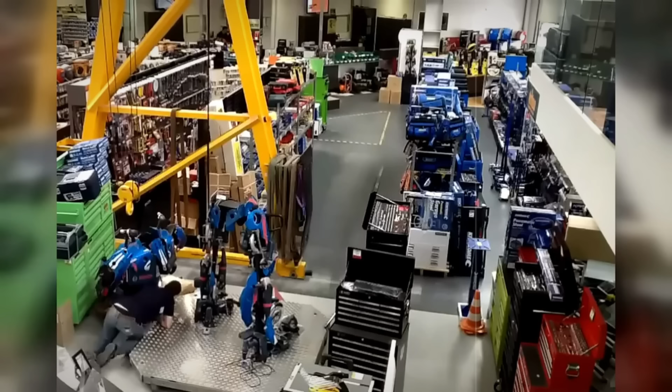Malaga, Western Australia, 2026. The showroom floor at Beyond Tools. Two Woodfast M910 wood lathes sit side by side, same badge, same model number, same word in horizontal font. One weighs 500 pounds, cast iron, made at 912 Port Road, Woodville, South Australia, in 1978. The serial number was stamped by a fitter named Graham Dowling.

The other is a lathe cast in Laoshan District, Qingdao, Shandong Province, China, priced at approximately 3,995 Australian dollars, made by Qingdao Jinling Electric Company in 2024. Both machines carry the Woodfast trademark. Both are called M910. Only one was made by Australians.

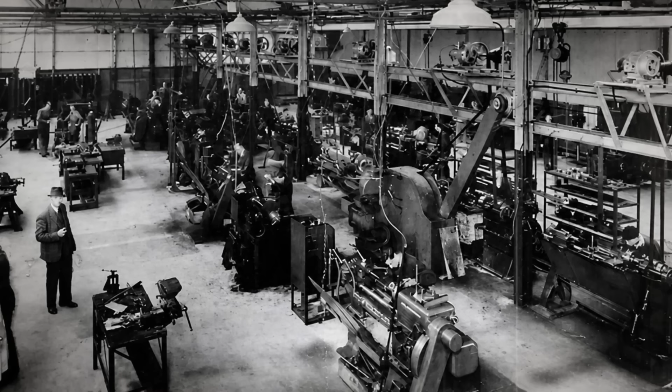85 years after Bonar Powell and John Hagan opened a workshop in Woodville on the 11th of June, 1941 — exactly 1 year to the day after Robert Menzies signed the Department of Munitions into being — the Woodfast that made the first machine no longer exists. The one that made the second is Chinese.

Chapter 1. Two M910s. Beyond Tools opened in 1986 as a wood tools and machinery sales business. Its warehouse and showroom sit in Malaga, a light industrial suburb 12 kilometres northeast of the Perth GPO. Tony Mirabile, the founder, has been in the woodworking machinery trade for 4 decades.

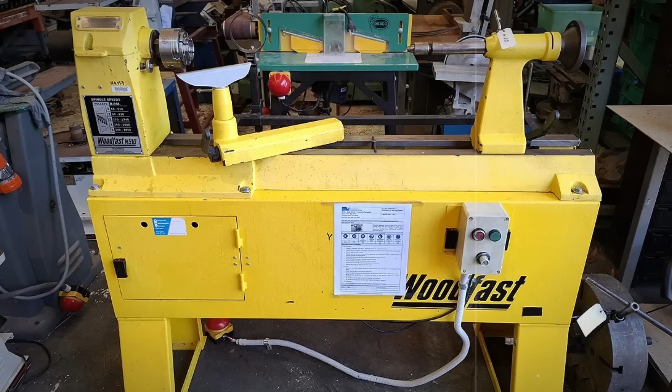On the floor today, a Woodfast WL5220A 20-inch heavy-duty lathe, approximately 3,995 Australian dollars. Beside it, a Woodfast M910. The M910 designation dates to the 1970s. The badge on the front dates to the 1940s. Both are unchanged.

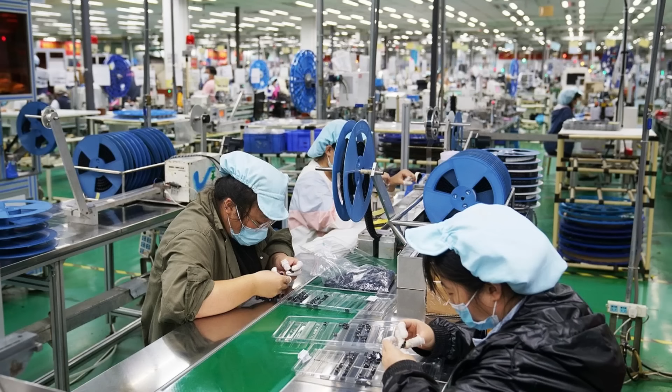6,000 kilometres northeast of Malaga, in a factory Beyond Tools has never visited, both machines were cast, machined, assembled, tested, boxed and shipped. That factory is Qingdao Jinling Electric Company in the Laoshan district of Qingdao, founded 1991. Between 300 and 450 employees, 24,000 square metres, 13 production lines, up to 500,000 woodworking machines a year, exported to Germany, Italy, Austria, the Czech Republic, the United States and Australia.

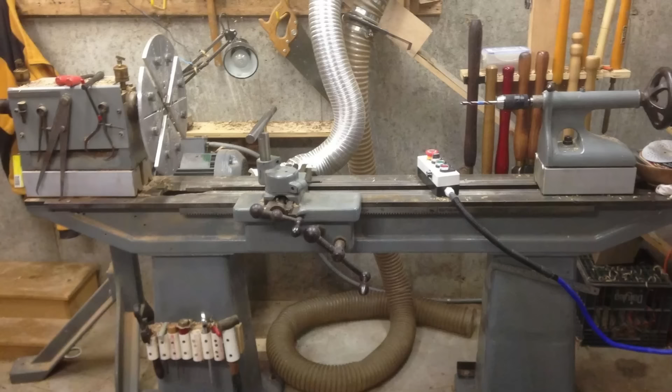The Woodfast M910 is one of those machines. The M910 that came off a South Australian shop floor in 1978, that a Western Australian wood turner bought second-hand in the 1990s and has used every Saturday morning since, is not on the Beyond Tools showroom floor. That machine has never been for sale in a showroom.

It came out of Port Road, Woodville. It ended up in a shed in the Perth suburbs. The Woodfast that made that machine, Woodfast Machinery Co, Adelaide, no longer manufactures anything. The Woodfast that made the machine on the Beyond Tools showroom floor is Qingdao Jinling Electric Company, a wholly Chinese firm operating an Australian brand name under a licence granted in 2004.

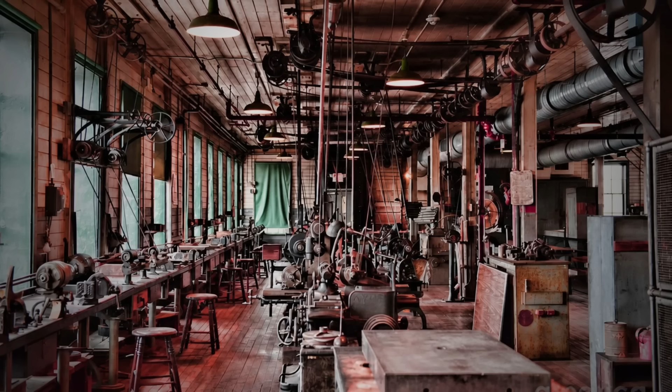Both machines are called Woodfast M910. Only one was made in Woodville. The other is a Chinese lathe with an Australian badge. But this story does not begin in a Beyond Tools showroom in Malaga in 2026. It begins in a workshop in Woodville, South Australia on the 11th of June 1941, exactly 1 year to the day after Robert Menzies signed into law the Department of Munitions that would arm the Pacific War.

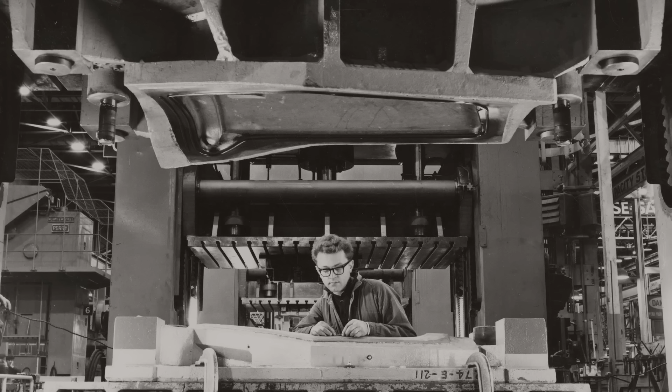Chapter 2. The Toolmakers of Woodville. The 11th of June, 1941, Woodville, South Australia. Two young toolmakers, Bonar Powell and John Hagan, register a partnership, trading name P&H Tools, S.A., Powell first, Hagan second. Their workshop stands in Woodville, an industrial suburb 8 kilometres northwest of the Adelaide GPO.

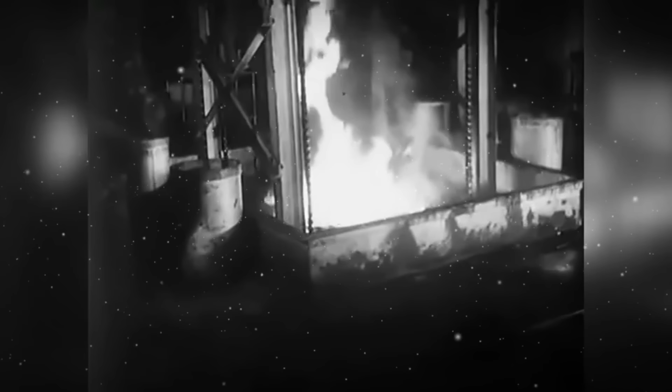Woodville has been transformed over the preceding 12 months by the wartime munitions surge. Premier Thomas Playford has drawn to South Australia the General Motors Holden Woodville plant, a short distance east, retooling for military production. 3 kilometres northwest lies the Hendon Small Arms Ammunition Factory. 2 kilometres due north sits the Finsbury Munitions Factory, opened February 1941. 10 kilometres further northeast, on the plains outside Salisbury, 3,000 men are pouring concrete for the largest explosives factory in Australian history. Powell and Hagan open their doors into this.

They do not make munitions. They make precision engineers' hand tools: squares, micrometers, machinists' rules, precision instruments for a country arming itself.

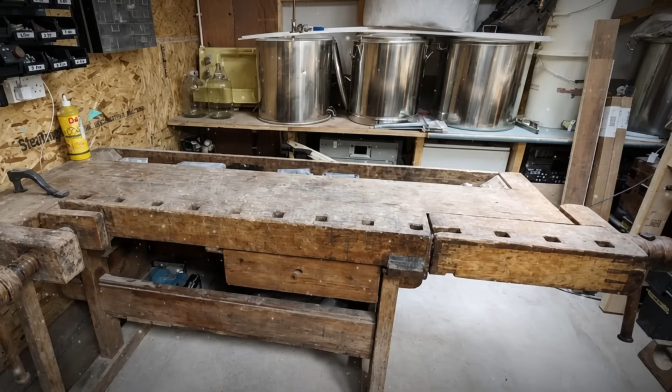The biographical record of Bonar Powell and John Hagan before that day in June 1941 is thin. No birth registration for either has been located in publicly accessible South Australian records. No prior employer is named. No trade paper obituary has been found for Powell. Hagan's later career is traceable through the company's own historical page, but of the men themselves, before Woodville, the record is silent. What is documented is what they built.

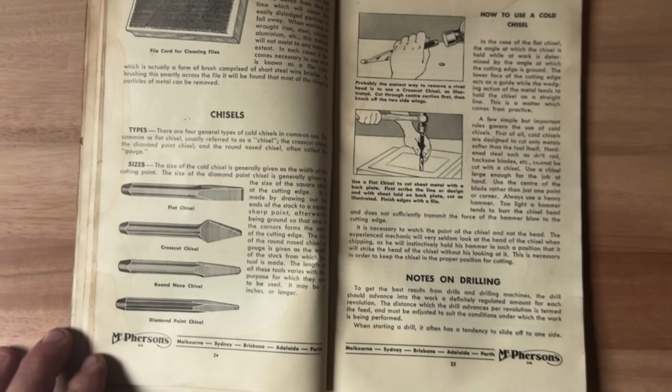1944. Powell and Hagen produced their first woodworking machine, a small belt and disc sander marketed under the trade name Woodfast. The origin of the name is undocumented, but what it evokes is exactly what it says: wood worked fast. A 4-inch buzzer and jointer follows, then a 14-inch cast-iron bandsaw that begins a 30-year supply relationship with McPherson's Hardware, which ships Woodfast bandsaws into every Australian hardware showroom from Perth to Cairns.

1946. The partnership discontinues engineers' hand tools. John Hagen becomes sole proprietor. Whether Bonar Powell exited voluntarily, was bought out, or died is not recorded in any accessible source. What is recorded: the Hagen family will own Woodfast for the next 58 years.

1950. The company renames Woodfast Machinery Company, October 1950. Hagen buys the Port Road, Woodville site, corner of Findon Road, 2 acres — the address that will become synonymous with the Woodfast brand for the next 59 years.

But before the Woodville workshop could arm a nation of woodworkers, before McPherson's could sell Woodfast bandsaws in every Australian hardware store, before Graham Dowling could walk through the Port Road gate as a 16-year-old apprentice, a different Melbourne, one year to the day earlier, had already begun to arm the country against a very different threat.

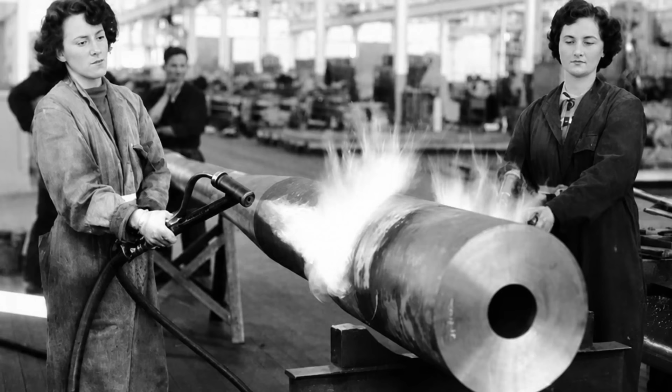Chapter 3. One year to the day, the 11th of June, 1940, Melbourne. Prime Minister Robert Menzies signs into law the national security regulations that formally establish the Department of Munitions. It is one week after the last British soldier is evacuated from Dunkirk. It is the day Australia accepts that Britain cannot arm the Empire alone. The man Menzies appoints as Director General is Essington Lewis, Managing Director of the Broken Hill Proprietary Company.

59 years old, born in Burra, South Australia, 13th of January, 1881. On the wall of his office at Munitions headquarters in Melbourne, framed in block capitals: 'I am work.' Lewis's charter, later described by cabinet colleagues, was as wide as the seas and as high as the sky — ultimate control over all ordnance, all explosives, all ammunition, all small arms, all aircraft, all vehicles, and critically for this story, all the machine tools used to make them.

Premier Thomas Playford of South Australia secures a disproportionate share of the wartime industrial windfall for his state. He argues Adelaide's central location and distance from the northern approaches make it defensible. Cabinet agrees.

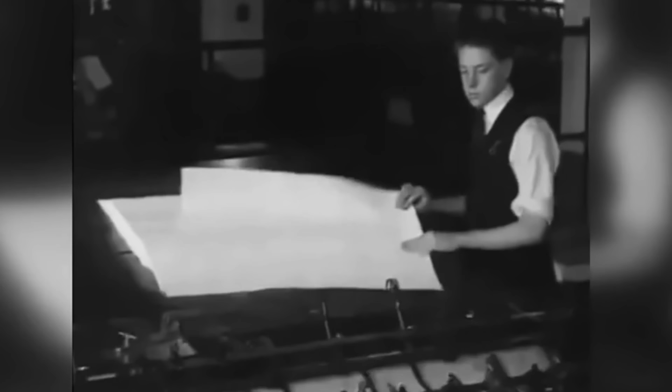The Adelaide toolmaking milieu explodes across the following 12 months. F.W. Hercus at the Barton expands. Perry Engineering at Mile End expands. Richards Industries at Keswick expands. Islington Railway Workshops takes on Beaufort sub-assemblies. Hendon Small Arms Ammunition Factory ramps to 100 million rounds a year. Finsbury Munitions Factory opens in February 1941. Salisbury Explosives Factory rises from bare paddock across late 1940 and 1941.

By June 1941, Woodville is not a suburb of Adelaide anymore — it is an industrial ring around a wartime capital. Read that again: exactly one year to the day after Menzies signs the Department of Munitions into being, on the 11th of June 1941, two young toolmakers named Bonar Powell and John Hagan open a workshop in Woodville, 10 kilometres from Salisbury, 5 from Hendon, 2 from Finsbury, 4 from GMH Woodville.

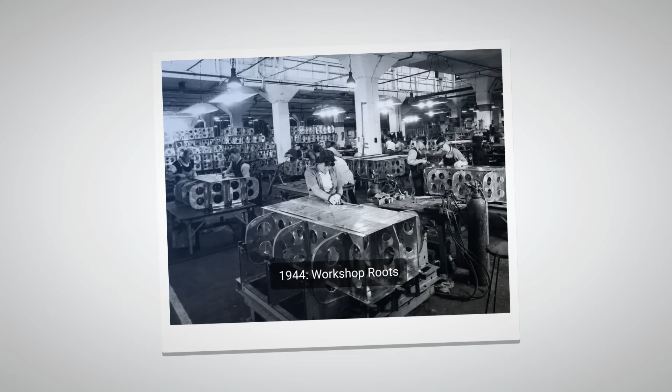They do not make munitions. They make precision engineers' hand tools. But they open their doors into a Woodville transformed by the war economy Essington Lewis has built. The company Powell and Hagan built at Woodville would not, in any documented sense, arm the war. But it would inherit the industrial ecosystem that did, and that inheritance would carry Woodfast for the next 63 years.

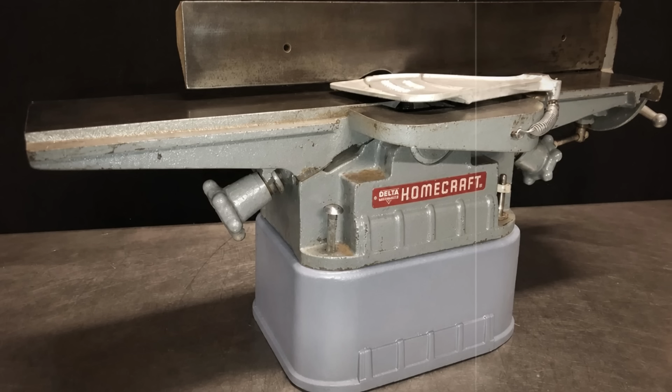Chapter 4: The Sander and the Bandsaw, 1944. Woodville. Powell and Hagan produced their first woodworking machine, a small belt and disc sander, cast iron body, marketed under the trade name Woodfast. It sells. A 4-inch buzzer jointer follows. Then the machine that will define Woodfast for the next four decades: a 14-inch cast iron bandsaw.

McPherson's Limited, the Sydney-Melbourne hardware distributor, established 1860 in Melbourne. By 1944, the largest hardware and machinery retailer in Australia, signs a supply agreement with Powell and Hagan. The relationship will last 30 years. Woodfast bandsaws ship into every McPherson's showroom from Perth to Cairns.

Farmers buy them. Cabinet makers buy them. Boat builders buy them. A country that has just finished making bomber wings on rail shed lathes has, in the post-war years, hobbies again.

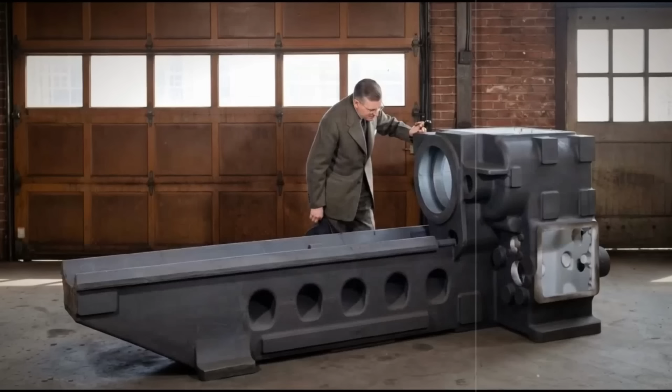1946. Engineers' hand tools are discontinued. John Hagan becomes sole proprietor. Whether Bonar Powell was bought out, retired voluntarily, or died is not recorded in any accessible public source.

What is recorded: the Hagan family will own Woodfast for the next 58 years. 1950, the company renames Woodfast Machinery Co, October 1950. Hagan buys the Port Road, Woodville site, two acres, corner of Findon Road, the address that will become synonymous with Woodfast for the next 59 years, until the 1st of December 2009, when the last Woodfast truck leaves Port Road for the last time.

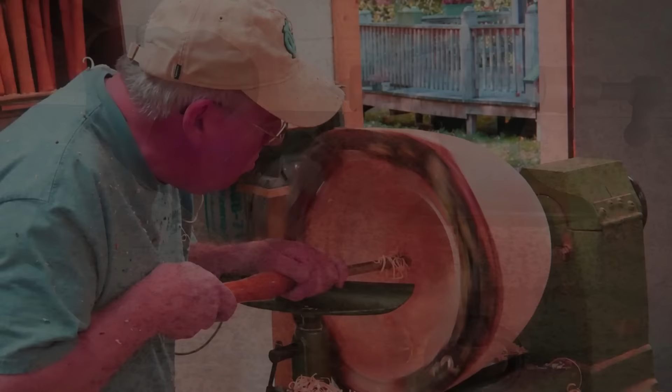Through the 1950s and 1960s, the product line expands. Wood lathes enter the range. The M910 lathe, the model number that will define Woodfast to a generation of Australian apprentices, enters production. 500 pounds of cast iron, heavy-duty class, cast headstock, solid tailstock, made to be used every day for 50 years. The M910 ships into TAFE workshops across South Australia, Victoria, New South Wales and Western Australia. It becomes the machine every Australian apprentice woodworker learns on.

A boy in Elizabeth turning his first bowl learns on a Woodfast M910. A boy in Broken Hill learning to shape a chair leg learns on a Woodfast M910. A boy in Rockhampton learning to spindle turn a stair baluster learns on a Woodfast M910.

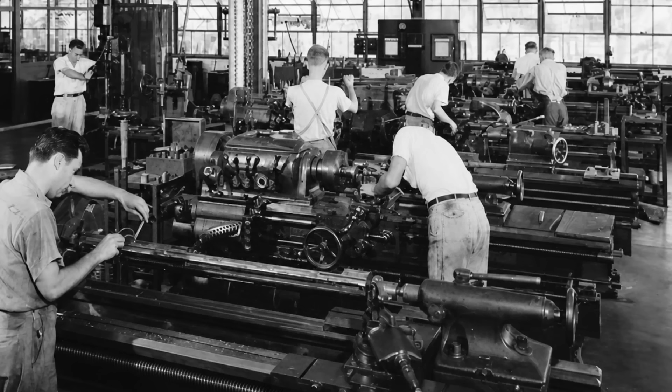Approximately 1967, a 16-year-old boy named Graham Dowling walks through the Port Road gate for the first time. He signs an apprenticeship indenture. Bonar Powell has been gone from the company for more than two decades. John Hagan is in his 50s. Woodfast has been trading under that name for 23 years. Graham will still be walking through Woodfast gates 56 years later.

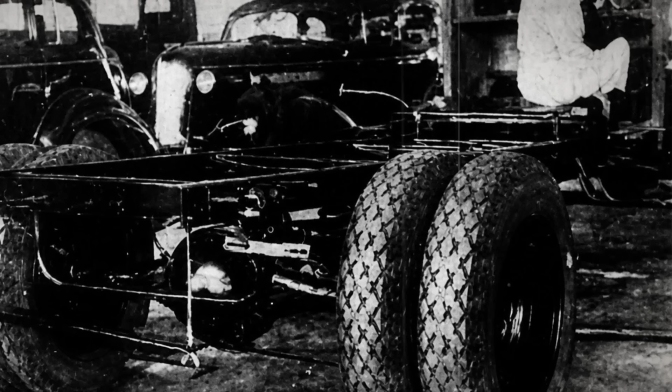But Woodfast did not grow in a vacuum. The Woodville that Powell and Hagan had opened their workshop into in 1941 was by 1945 the industrial heart of the Adelaide cluster that had armed the Pacific. The men who ran those cluster factories were Woodfast's neighbours, Woodfast's customers and Woodfast's suppliers.

Chapter 5. I Am Work.

May 1940, Melbourne. Prime Minister Robert Menzies appoints Essington Lewis, Managing Director of the Broken Hill Proprietary Company, as Director General of Munitions. Lewis is 59 years old, born the 13th of January 1881 in Burra, South Australia. He has led BHP since 1926. He is the most powerful industrialist in the country. On the wall of his office at Munitions headquarters in Melbourne, framed in block capitals: I Am Work.

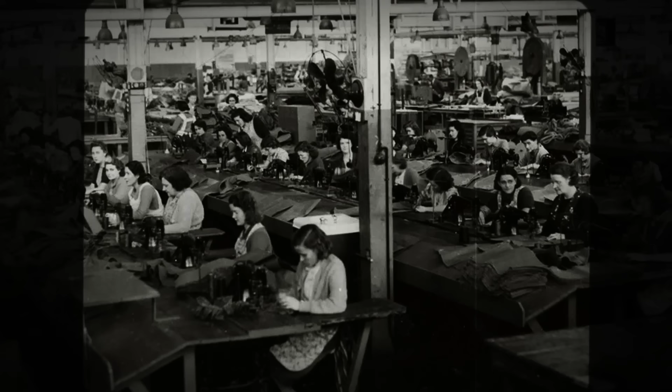The 11th of June, 1940, the Department of Munitions is formally established. Lewis places every South Australian machine shop, every engineering firm, every foundry, every railway workshop on a war footing. Contracts at actual cost plus a margin, usually 10%. No competitive tender, no negotiation.

January 1942, Lewis's powers are extended. He becomes Director General of Aircraft Production as well. He now controls both munitions and airframes. The Adelaide plants convert.

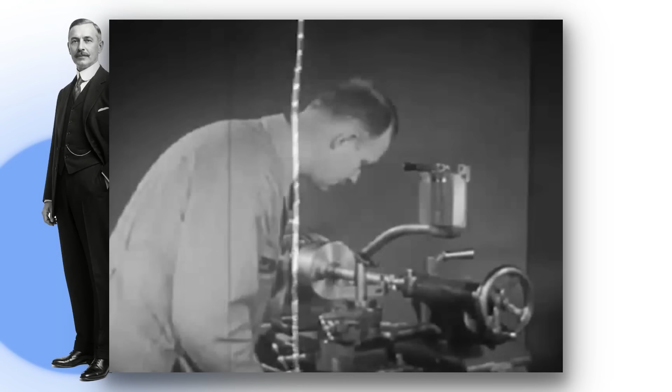F.W. Hercus of Thebarton, founded by Frederick William Hercus in May 1920, becomes the largest machine tool producer in the Southern Hemisphere. Under the Directorate of Machine Tools and Gauges, Hercus produces in excess of 2,300 machines during the war. The Hercus 9-inch swing lathe, a South Bend clone built at the War Department's request for the small arms factories, becomes the workhorse of Australian industry. 15,000 9-inch and 8,000 later Model 260 lathes will be built over the company's life.

23,000 lathes, Adelaide made. Perry Engineering at Mile End, founded by Samuel Perry, 1865 to 1930, the largest engineering company in South Australia by 1916. In the Second World War, major munitions component maker plus 75-foot steel tugs across 1944 and 1945.

T.J. Richards and Sons, renamed Richards Industries Limited in September 1941. The Keswick and Mile End South plants. From mid-1942, producing wing panels, centre sections and fuselages for the Bristol Beaufort bomber. Also Lancasters. Also the CAC Wirraway.

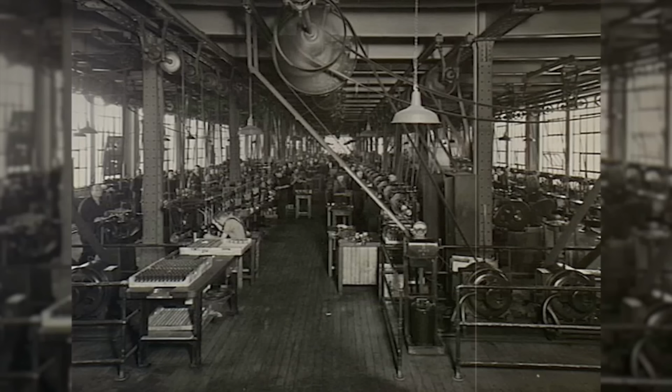Islington Railway Workshops, Beaufort mainplane and central component production, feeding the 700 aircraft Beaufort program. Hendon Small Arms Ammunition Factory, one of the largest small arms plants in the Southern Hemisphere at wartime peak, produced .303 rifle rounds by the 100 million.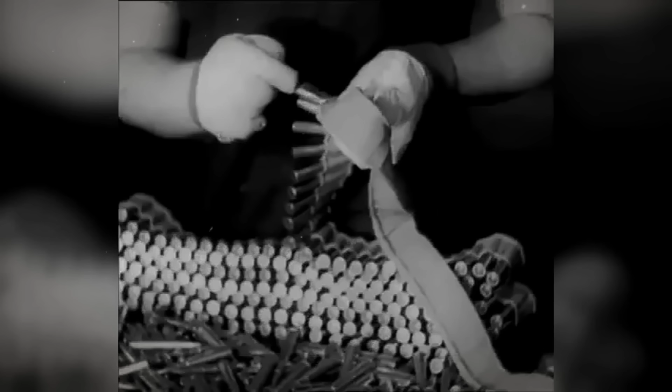Finsbury Munitions Factory opened in February 1941 on a 50-hectare site with approximately 4,000 workers, many of them women, and produced cartridge cases and fuses. Designed by engineer John Adrian Fargher, served by a rail spur running from Woodville Station. Salisbury Explosives Factory, the largest in Australia, built November 1940 to November 1941.

Approximately 3,000 workers. GMH Woodville, the General Motors Holden plant 4 kilometres from Powell and Hagan's workshop, was retooled for Beaufort airframe components, armoured car bodies, anti-tank guns, and Bofors gun tractors.

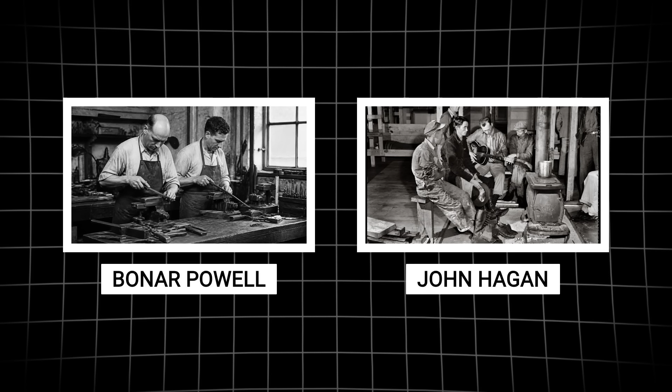And this is where it gets genuinely insane. The rail spur that carried cartridge cases from the Finsbury Munitions Factory to Woodville Station in 1942 ran within 600 metres of the Woodville workshop, where Bonar Powell and John Hagan were, at that exact moment, making precision engineers' hand tools for civilian sale. 600 metres. 2 minutes walk. Here's the thing.

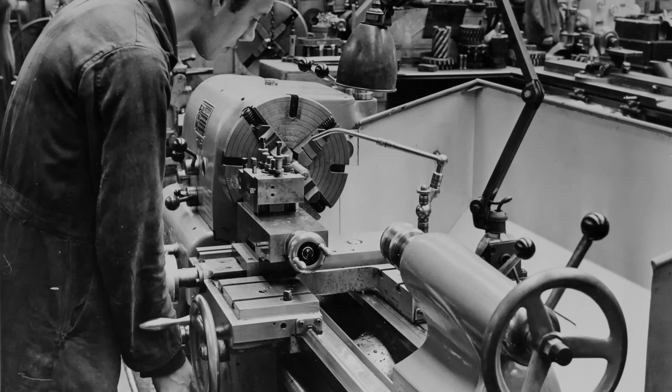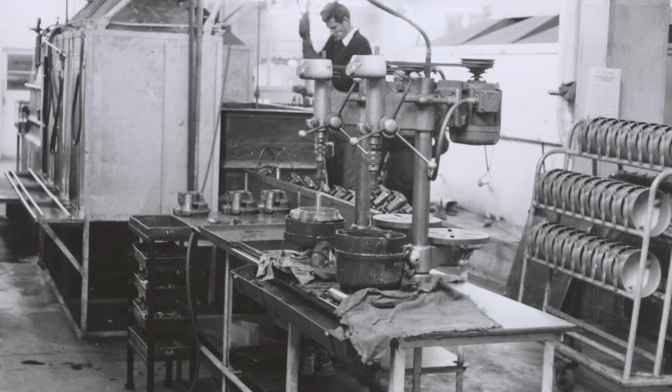Powell and Hagan did not make war material. No National Archives contract lists Woodfast. No Directorate of Machine Tools and Gauges roster names it. Woodfast's first product, the belt and disc sander, would not appear until 1944. Its bandsaw contract with McPherson's was post-war. Its lathes were post-war. But Woodfast grew up in the shadow of the plants Lewis armed. It inherited the workforce those plants trained. Every fitter and turner Woodfast hired in the 1950s had trained on a Hercus lathe under a Directorate of Machine Tools and Gauges apprenticeship. Every foundry in South Australia that supplied Woodfast castings had, in 1942, cast bodies for 25-pounder shells. Every draftsman who ever drew a Woodfast bandsaw schematic had learned his trade under wartime apprenticeship contracts administered by the Directorate of Machine Tools and Gauges. The Adelaide toolmaking milieu was not something Woodfast joined. It was something Woodfast was made from.

The Woodville that Powell and Hagan opened their workshop into on the 11th of June, 1941, 1 year to the day after the Department of Munitions was established, was the wartime industrial heart of South Australia. And when that industrial heart began to fail, 60 years later, Woodfast would fail with it.

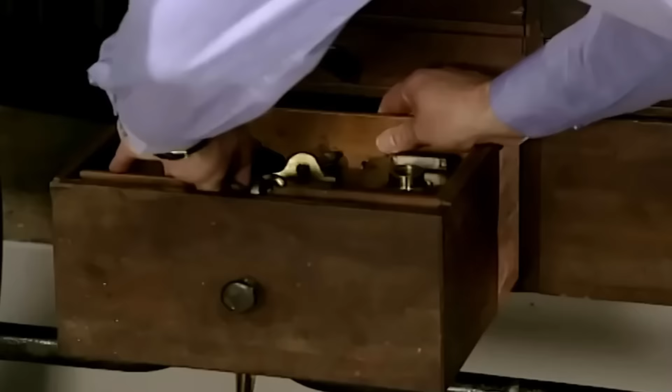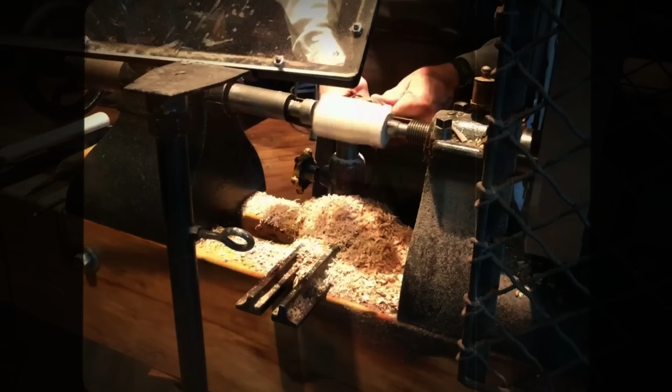Chapter 6. Port Road, October 1950. John Hagan buys the 2-acre site on the corner of Port Road and Findon Road, Woodville. Purchase price is not disclosed in any accessible record. Through the 1950s and 1960s, the factory expands. Woodworking machinery becomes the sole business. Bandsaws, buzzers, jointers, thicknessers, sanders, and increasingly, wood lathes. June 1965. Documented figure, the only headcount figure ever verified in the accessible archive, 61 employees at the Port Road plant.

21 distinct machine types in production. 12% of Woodfast's output goes overseas. The company ships into TAFE workshops from Perth to Cairns, into apprenticeship schools from Broken Hill to Wollongong, into every Australian shed that ever housed a serious hobbyist. The Woodfast M910 becomes the machine every South Australian apprentice trains on.

Approximately 1967. Graham Dowling walks through the Port Road gate at 16. He signs the papers. He will still be walking through those gates 37 years later, when the papers of a very different kind will be signed.

1980. The Port Road factory expands to 360,000 square feet. Woodfast is by now the dominant Australian woodworking machinery manufacturer. 1984. John Hagan retires. He has led the company for more than 40 years. His replacement as Managing Director, Bronte Edwards. 1984, the same year, a new showroom and administration complex is completed on the Port Road frontage. Cost, approximately 300,000 Australian dollars. It is the physical announcement that Woodfast has arrived.

1984, the same year. On the 30th of May, in Canberra, Senator John Button announces the Motor Industry Development Plan. Vehicle tariffs will fall from 57.5% to 15% by 2000. The Woodfast showroom rises on Port Road at the exact historical moment John Button begins dismantling the tariff structure that has made Adelaide machine tool manufacturing viable.

Neither Bronte Edwards, nor Graham Dowling, nor any of the 61 Port Road employees fully understand what has just happened. The tariff cut that had begun on the 18th of July 1973 would not close Woodfast in that year or the next or the one after. But every year after 1973, the machine tool industry that Woodfast belonged to shrank.

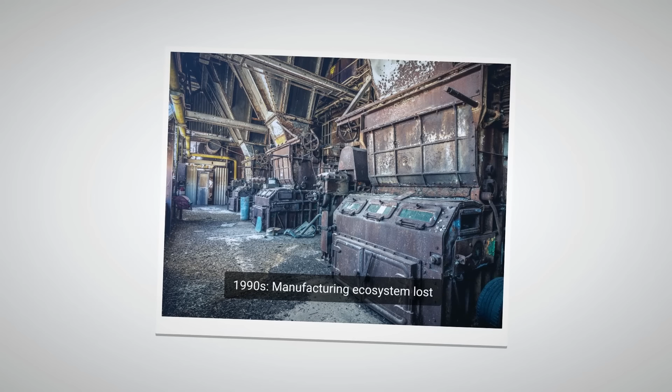Chapter 7. The Cascade, 18th of July, 1973, 7 p.m, Canberra. Prime Minister Gough Whitlam and Trade Minister Jim Cairns announce a 25% across-the-board cut to all Australian import tariffs. Effective midnight, Australian machine tool manufacturing faces imported competition for the first time since the wartime protection wall went up. Between 1973 and 1980, Australian manufacturing employment falls by approximately 80,000 jobs. The Adelaide cluster begins to contract.

30th of May 1984. Senator John Button announces the Motor Industry Development Plan. Vehicle tariffs to fall from 57.5% to 15% by 1992. May 1988. Prime Minister Bob Hawke's economic statement, the largest general tariff cut since Whitlam's 25% quarter. The general manufacturing rate is placed on a downward glide path. 12th of March, 1991. Treasurer Paul Keating's One Nation statement extends the tariff cuts to the year 2000.

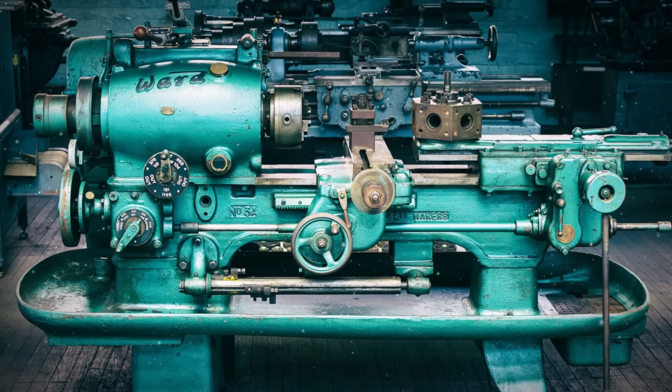1997. Prime Minister John Howard freezes the passenger vehicle tariff at 15%, but the machine tool tariff has already gone. The manufacturing environment Woodfast grew up in has ended. 2000, manufacturing tariff at 15%. 2005, 10%. 2010, 5%. Here's the thing.

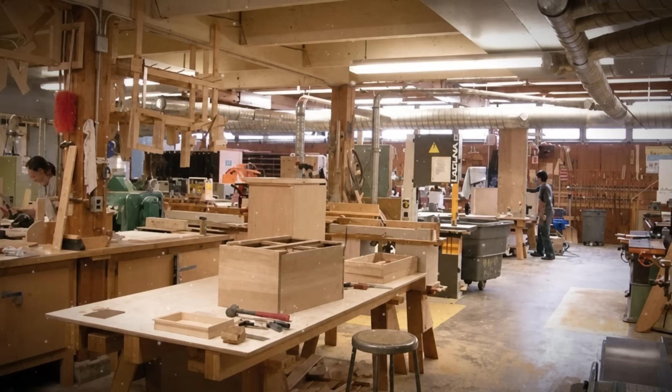Woodfast did not shut down in any of these years. It kept trading, it kept selling M910 lathes. Bronte Edwards ran the shop, Graham Dowling was on the floor. But every year, more of the components Woodfast sourced came from overseas. Every year, fewer apprentices came through the door, because the TAFE workshops that bought Woodfast lathes were themselves shrinking.

Australian apprenticeships had peaked at 161,000 in 1990. By 1994, they had fallen to 131,000. The training pipeline that had fed Woodfast's customer base for 40 years was closing. And Woodfast's Adelaide same-lane peer, F.W. Hercus of Thebarton, the company that had built 23,000 lathes across 85 years, showed Woodfast what the ending looked like.

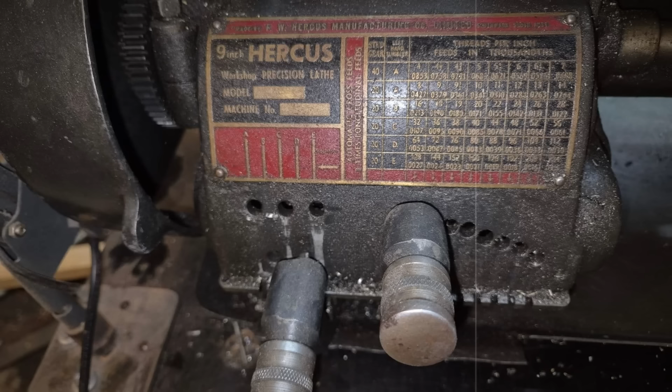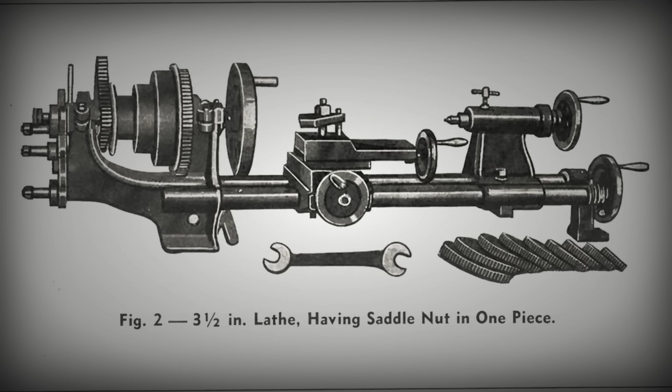Chapter 8: What Hercus Did. F.W. Hercus, founded May 1920 by Frederick William Hercus, Payneham Road, then Anderson Street, Southwark from 1939, then Regency Park, 23,000 lathes across the company's life. The Hercus 9-inch swing became the standard Australian workshop lathe, the machine every Australian tradesman under 60 learned on. The Hercus name was to Australian machine tools what the Hoover name was to American vacuum cleaners.

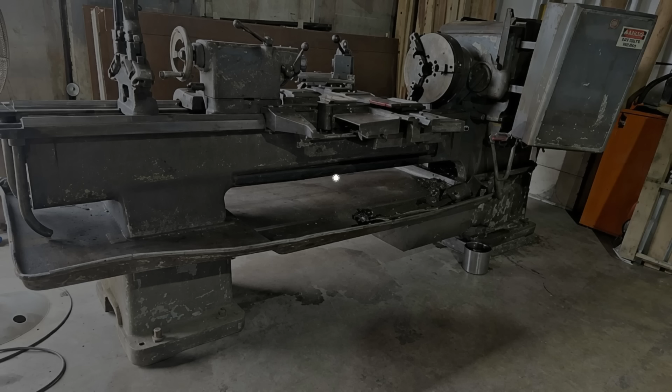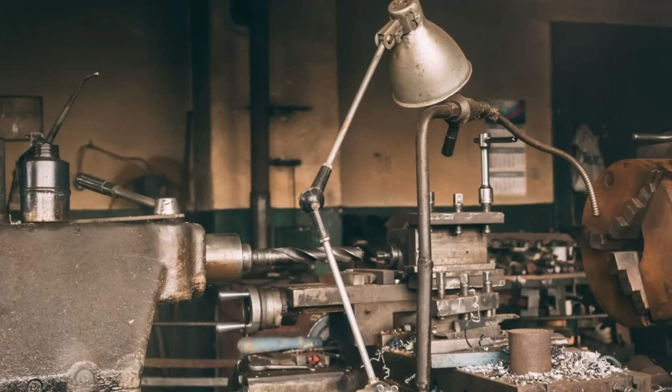The Regency Park site continues as a general engineering business under Durden ownership. The lathe business dies. 23,000 Adelaide-made lathes, 85 years, gone. Let that number sit for a moment. 23,000 lathes, 85 years. Every Australian technical college and trade school workshop in the 1950s, 60s and early 70s, and

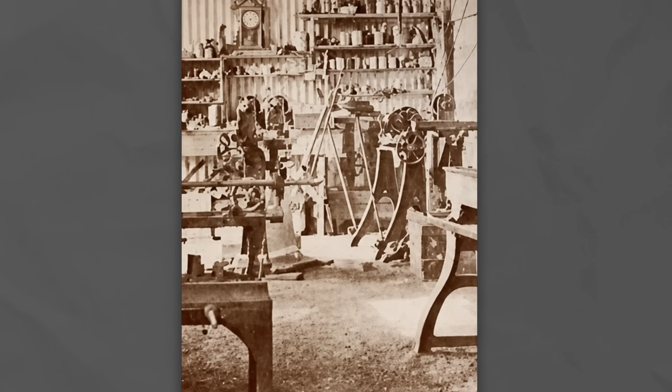every TAFE workshop from 1974 onwards had a Hercus in it. Every South Australian tradesman under the age of 70 today learned to turn on a Hercus. And by 2005, that company, the largest machine tool maker in the Southern Hemisphere at its peak, no longer existed as a manufacturer.

If you were Bronte Edwards, sitting in the Port Road office in 2003, watching Hercus die 4 kilometres away across Woodville, you were watching your own industry die in real time. If you were Graham Dowling on the Woodfast shop floor, watching the trucks unload imported components from Taiwan and China because the local castings foundry no longer took orders for cast iron lathe beds, you were watching the ecosystem that had made you a tradesman disappear.

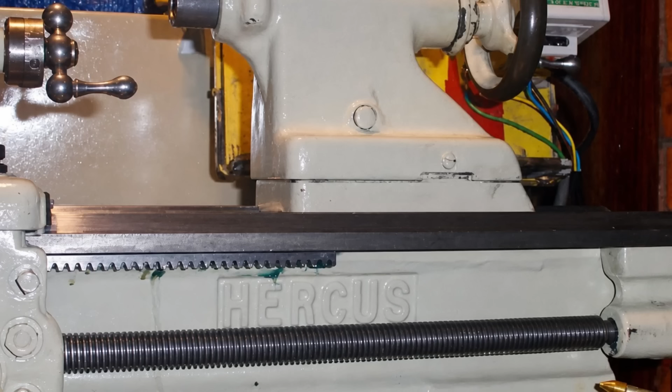The question at Port Road by the early 2000s was not whether, it was how. And on a day in 2004, the exact date not recorded in any accessible public source, Woodfast Machinery Co chose how. Chapter 9.

2004, Port Road, Woodville, South Australia. Woodfast Machinery Co signs papers with Qingdao Jinling Electric Company of Laoshan District, Qingdao, Shandong Province, China. The transfer is not what most Australian brand offshorings look like. It is not a full corporate acquisition. It is not a receivership fire sale.

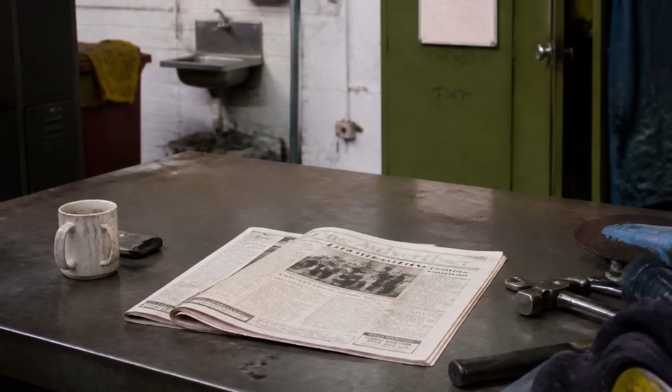It is not, as far as any public record shows, driven by insolvency. There is no ASIC Administrator's Notice for 2004. There is no Advertiser front page. There is no AMWU press release. What Woodfast transfers is specifically the following: the design and manufacturing rights for 2 lathe models, the C1000 and the M910, and the single-word trademark Woodfast, in horizontal font. 2 blueprints, 1 word, 1 Chinese company. Read that again. 2 blueprints, 1 word, 1 Chinese company.

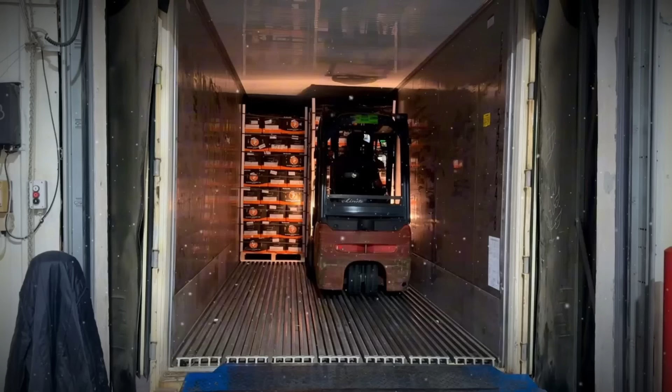Not the factory, not the workforce, not the tooling, not the company itself. Just the drawings and the name. The Adelaide Woodfast Machinery Co keeps trading. It continues at 912 Port Road. It continues to distribute machinery, increasingly imported.

Bronte Edwards continues as managing director. Graham Dowling continues on the floor. But the M910, the heavy-duty cast-iron lathe that had defined Woodfast for 4 decades, is now, in law, a Qingdao product. The individual who signed the papers on the Australian side is not named in any accessible public record. No press release, no Advertiser story, no Hansard reference, no AMWU response. No obituary or interview since.

The papers were signed quietly. The Qingdao executive who signed on the QCR side is not named either.

QCR would formally register the Woodfast trademark in 2014, 10 years after the transfer, when the machines it had been building under the licence had established a market presence significant enough to warrant formal trademark protection.

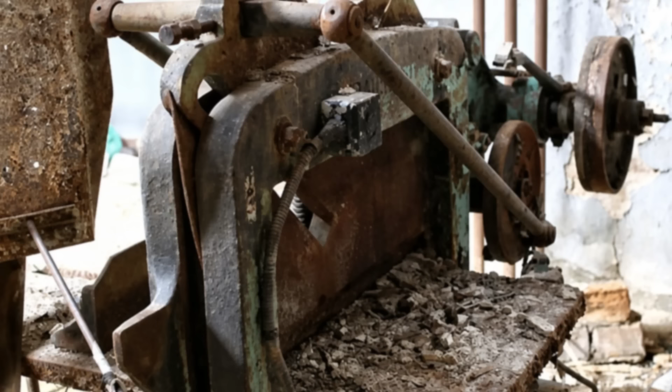Sale price, not disclosed. Not in ASIC records. Not in Chinese state disclosures. Not on the Woodfast historical page. Not in any accessible archive. Employment at the Adelaide plant immediately before the transfer, not documented. Employment lost after the transfer, not documented.

What is documented is what was sold: 2 blueprints, 1 word, 1 Chinese company. That is what Woodfast, the Australian company, sold on that day. The buyer's factory in Laoshan was 13 years old at the time of the transfer.

QCR had been founded in 1991. The 2 blueprints, one for the C1000, one for the M910, represented 40 years of Adelaide toolmaking iteration, of Powell and Hagen and their successors refining cast iron beds and headstock alignment across 4 decades. That accumulated knowledge transferred to QCR in the form of technical drawings. Blueprints can be copied. Institutional memory cannot.

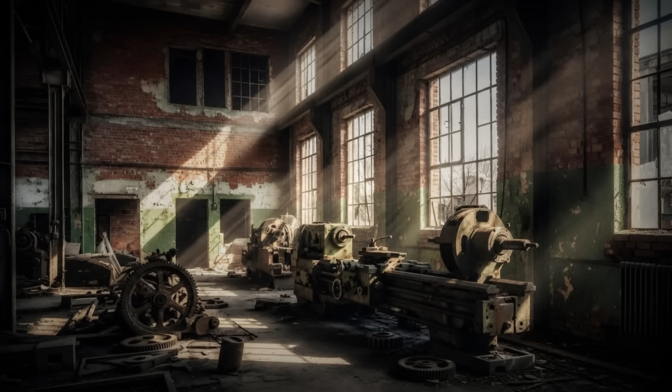And on the 1st of December 2009, 5 years, 5 months, and roughly 3 weeks after those papers were signed, Woodfast Machinery Co left Port Road for the last time.

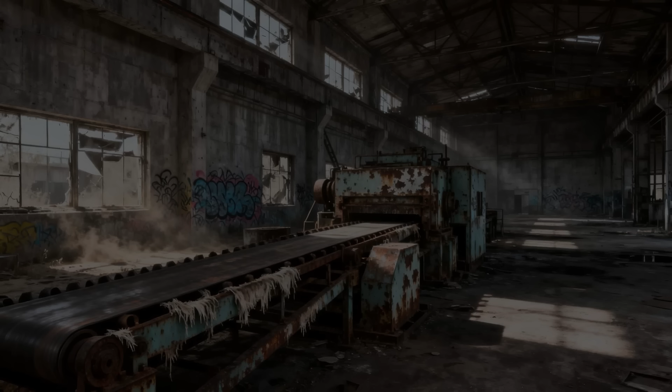Chapter 10. Royal Park, 1st of December 2009. Woodfast Machinery Company, Australia Proprietary Limited relocates from 912 Port Road, Woodville to 1174 Old Port Road, Royal Park, 6 kilometres away. The move is not marketed as a closure, it is marketed as a modernisation. New premises, better logistics, consolidated operations. The reality: the Port Road factory that had made lathes for 59 years is no longer needed.

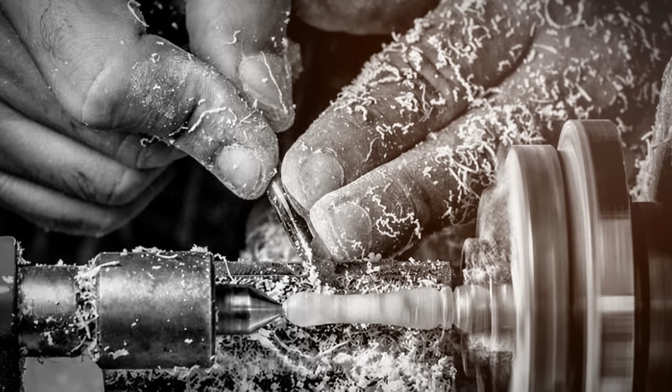Manufacturing is in Qingdao. The Royal Park address is a distribution and service operation. A new corporate entity, Woodworking Solutions Proprietary Limited, is formed at Royal Park. Its principals, Graham Dowling and a colleague known only as Steve, both are ex-Woodfast men. Both have decades on the Port Road floor.

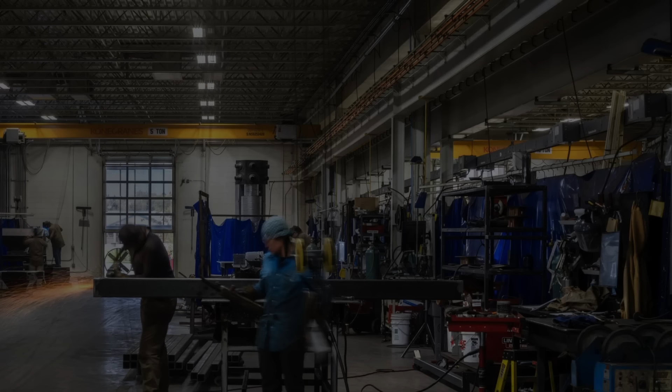Graham Dowling is now approximately 58 years old. He has been at Woodfast since he was 16. He does not fully retire. He runs Woodworking Solutions from Royal Park, selling and servicing the Chinese-made Woodfast lathes his company had, 5 years earlier, sent the blueprints for. Steve joins him. Steve's surname does not appear in any accessible record.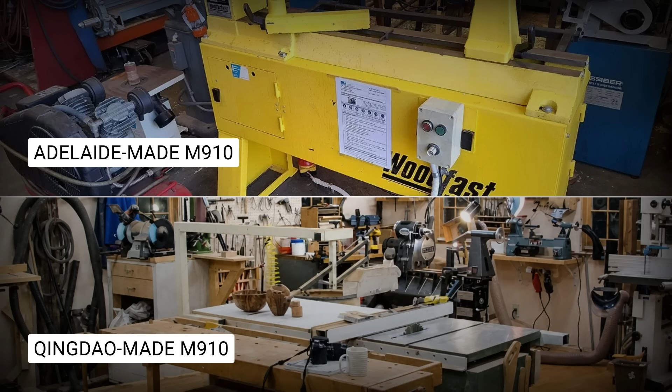Through the 2010s, Woodworking Solutions continues. Graham Dowling walks into Royal Park each morning. He services machines he built himself 30 years earlier. He services machines he sent the blueprints for 5 years earlier. Sometimes both machines are on the workshop floor on the same day. The Adelaide-made M910 and the Qingdao-made M910, side by side, waiting for parts. Same badge, different weight, different castings, same customer.

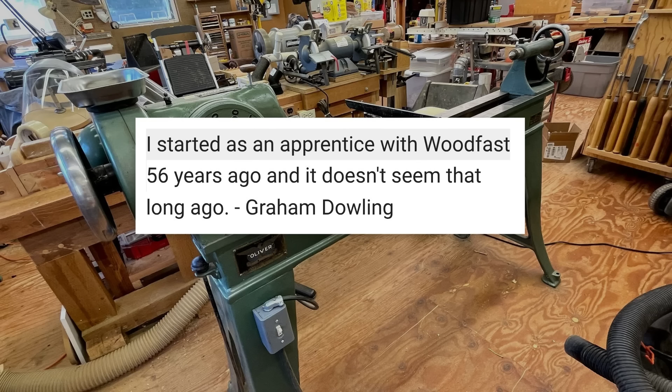Graham writes a Facebook post in 2023, a message on the Australian Woodworkers Facebook page that reads, in his own words: 'I, Graham, started as an apprentice with Woodfast 56 years ago, and it doesn't seem that long ago.' 56 years, 1967 to 2023. From the Port Road floor to the Royal Park distribution counter. From the machines Bonar Powell and John Hagan cast in Woodville to the machines Qingdao Jinling Electric Company cast in Laoshan.

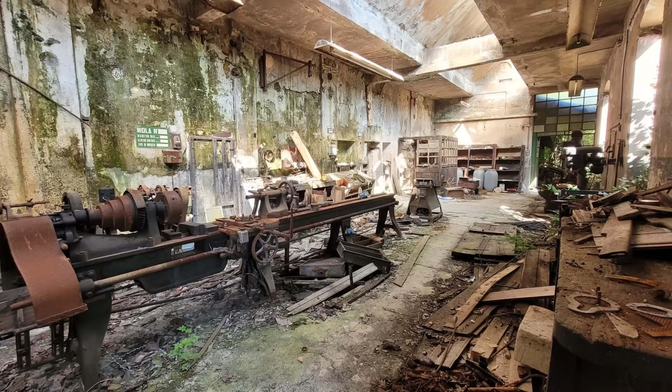Between approximately 2018 and 2022, the exact date not recorded, Woodworking Solutions ceases trading. Graham Dowling retires. Steve retires. The last Adelaide business carrying the Woodfast name in a working sense closes. The Woodfast brand does not die. It has, by 2021, a new Australian steward, Tony Mirabile, of Beyond Tools in Malaga, Western Australia.

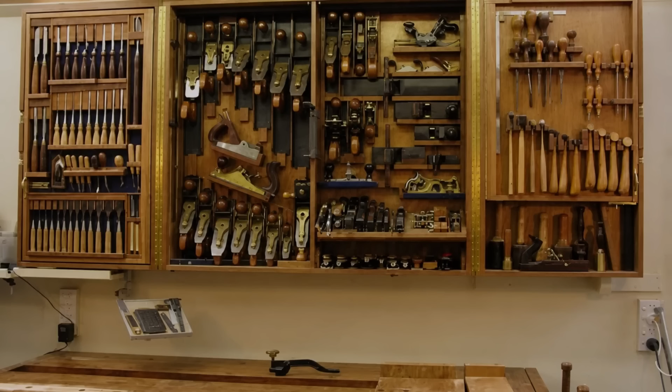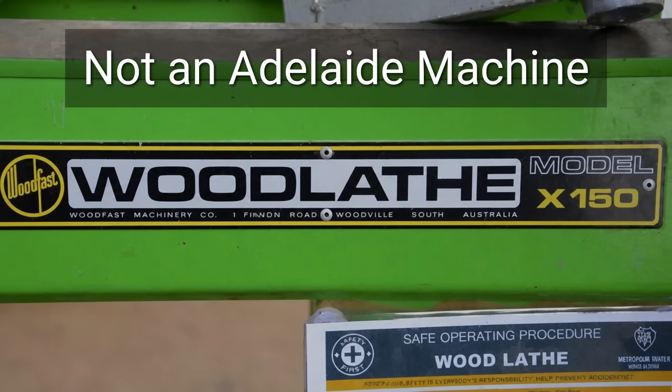The Woodfast M910 you can buy from Beyond Tools in Malaga today is not the M910 that Powell and Hagan designed. It carries the same model number. It carries the same word in horizontal font. It is made in Qingdao. It is distributed from Malaga. It is not, in any sense that would be recognised by the men who trained Graham Dowling, an Adelaide machine.

And if you walk into Beyond Tools in Malaga today, you can buy a Woodfast M910 wood lathe for approximately $3,995 Australian dollars.

It weighs less than the one Graham Dowling used to build. It comes from a factory Graham has never seen. Chapter 11: The same model number.

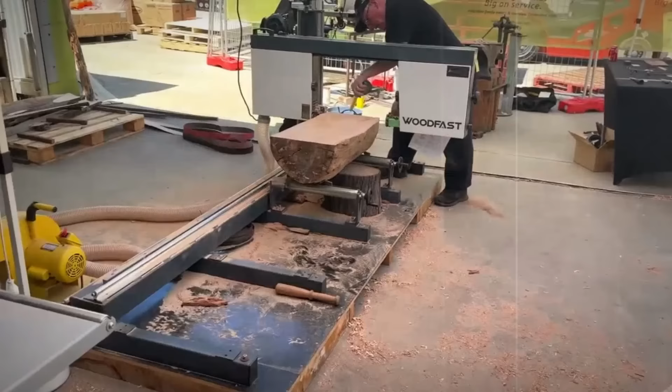Walk into the Beyond Tools showroom in Malaga, Western Australia today. Turn left past the entrance, into the Woodfast section. On the floor, a Woodfast WL520A 20-inch heavy-duty lathe, retail price approximately $3,995 Australian dollars.

Beside it, a Woodfast M910. The badge is the same badge that sat on the machines Bonar Powell and John Hagan shipped from Port Road, Woodville, in the 1970s. The model number is the same model number Graham Dowling stamped on machines in 1978. The company that made the machine on the showroom floor is Qingdao Jinling Electric Company of Laoshan District, Shandong Province, China. The company that made the machine Graham Dowling stamped in 1978 no longer exists as a manufacturer.

6,000 kilometres away, at 912 Port Road, Woodville, the corner of Findon Road, the 2-acre site Woodfast bought in October 1950 either still stands empty of purpose or has been demolished for something else. The public record does not confirm which. There is no heritage plaque, no marker to indicate that this was the address of the largest Australian-made woodworking machinery manufacturer of the 20th century.

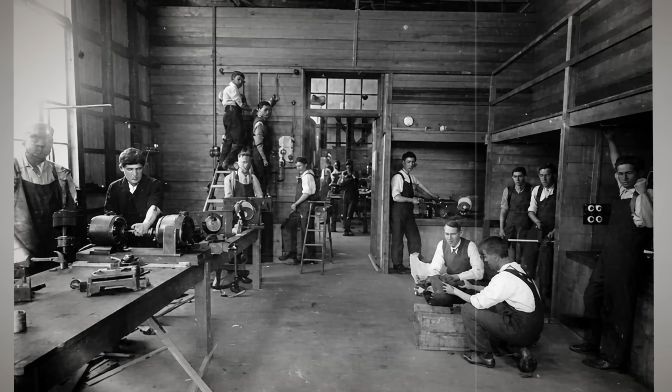Lesson 1: Manufacturing is not the machine. It is the men who made it. Bonar Powell and John Hagan founded Woodfast in a Woodville workshop on the 11th of June, 1941. They trained apprentices; those apprentices trained apprentices. Graham Dowling started at 16 in 1967. He worked the Port Road floor for the next 37 years.

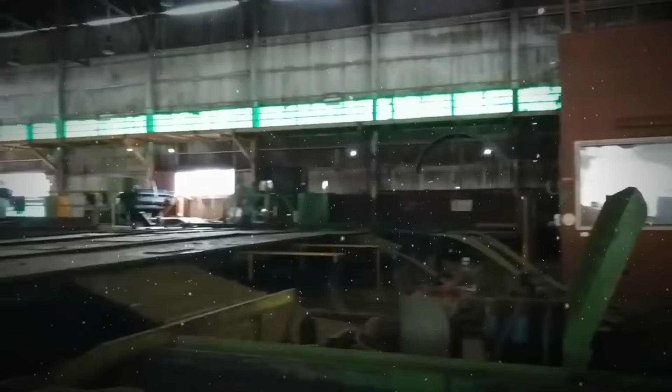When the 2 blueprints and the 1 word were sold to Qingdao in 2004, the machines could be replicated. The men could not. Every Australian apprentice trained on a Woodfast lathe was trained by a man trained by a man trained by Powell or Hagan. That chain broke in 2004. It has not been re-established. Manufacturing is not the machine. It is the men who made it.

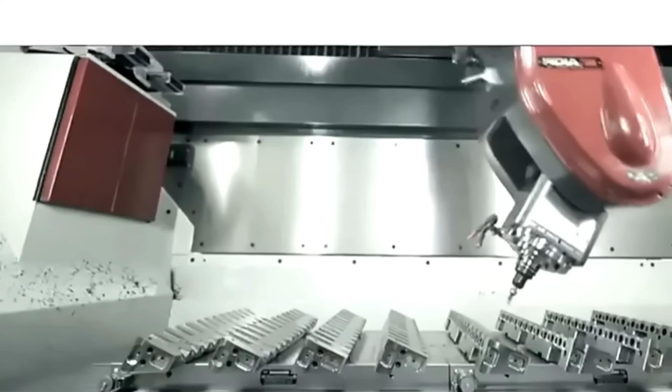Lesson 2: A trademark is not a country. The Woodfast M910 you can buy today carries the same model number as the M910 Graham Dowling stamped in 1978. It carries the same badge, the same word in horizontal font. It is not the same machine. It weighs less. It is cast in Qingdao, assembled in Laoshan, distributed from Malaga, designed by engineers who never met Powell or Hagan.

A trademark is not a country. A model number is not a workforce. A badge is not a lineage. The Woodfast brand survives. What made it Woodfast does not.

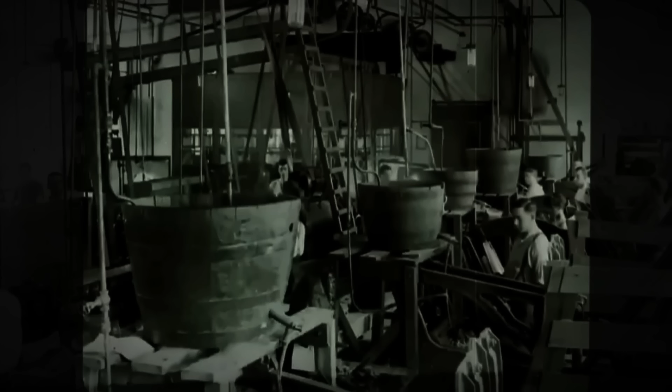Lesson 3: Some families sell, some families keep. In November 2023, the Keir family sold Akubra, the Kempsey hat maker, 5 generations, 140 years, to Andrew and Nicola Forrest's Tattarang. Australian to Australian. The Kempsey factory kept trading. The 120 employees kept their jobs.

In January 2024, David John Heine, chairman of John Heine and Son, the Sydney Machine Tool Foundry, signed voluntary liquidation papers on the family's 5-generation, 137-year-old company. He said publicly, in his own words, quite often the family outgrows the company. No offshoring, a dignified end.

In 2004, someone at Woodfast Machinery Co signed papers transferring 2 blueprints and 1 word to Qingdao. No press release. No named signatory. No dignified end. 3 Australian families, 3 endings. Some sell to keep. Some wind down with dignity. Some ship offshore and let the name outlive the country. All 3 are choices. Only 2 are honest.

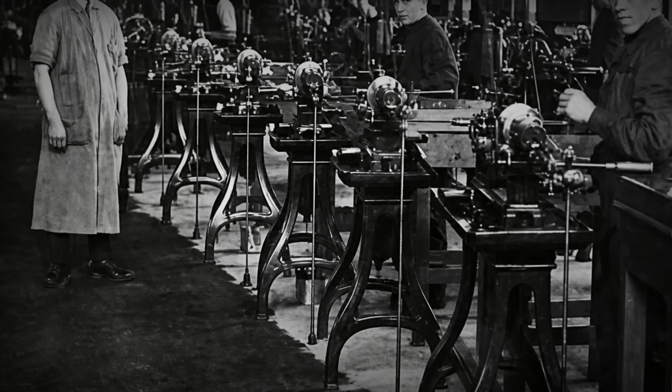11th of June, 1940: the Department of Munitions established. 11th of June, 1941: Woodfast founded. 1 year to the day apart. Read that again: 1 year to the day. The Adelaide toolmaking milieu Essington Lewis built. Between June 1940 and June 1945, Hercus, Perry, Richards, Islington, Hendon, Finsbury, Salisbury, GMH Woodville was the ecosystem Woodfast grew up in.

By 2004, Hercus had stopped making all Australian machines. Perry Engineering was demolished. Richards had been Chrysler, then Mitsubishi, then closed. Islington was gone. Hendon was gone. Finsbury was gone. Salisbury was gone. GMH Woodville was on countdown to closure at Elizabeth. When Woodfast signed the papers for the blueprints and the word, there was no Adelaide machine tool cluster left for it to stay inside of.

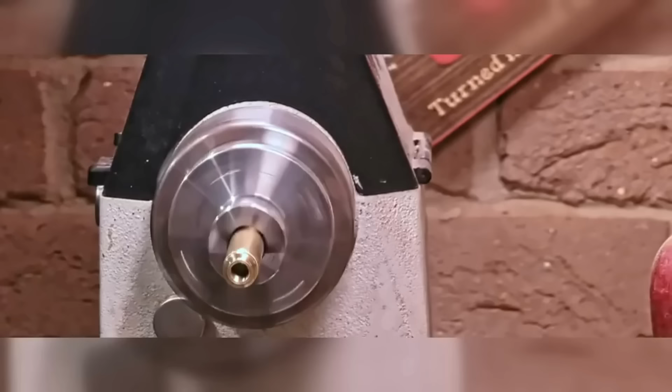The M910 sits in Beyond Tools showrooms today. The badge is the same. The machine is not. 85 years since Powell and Hagan opened the workshop. 63 years from the founding to the sale. 22 years from the sale to the present. The brand survives. The men who made it do not.